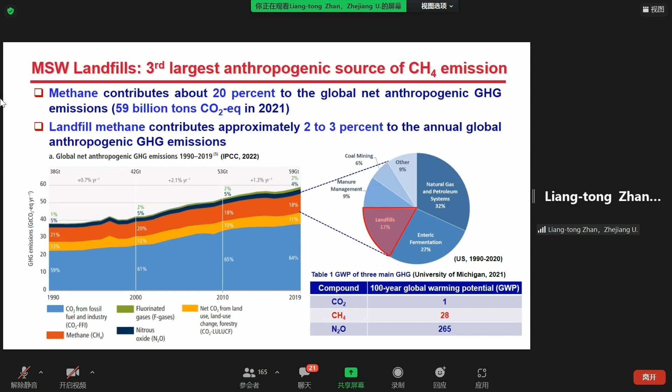How about landfill methane emission potential in mainland China? Between 1980 and 2020, 3.3 billion tons of waste was disposed of in thousands of landfills.

From 2021 to 2030, 0.85 billion tons of waste will still be landfilled at sanitary landfills. Landfill emission potential from such a huge amount of waste should be evaluated.

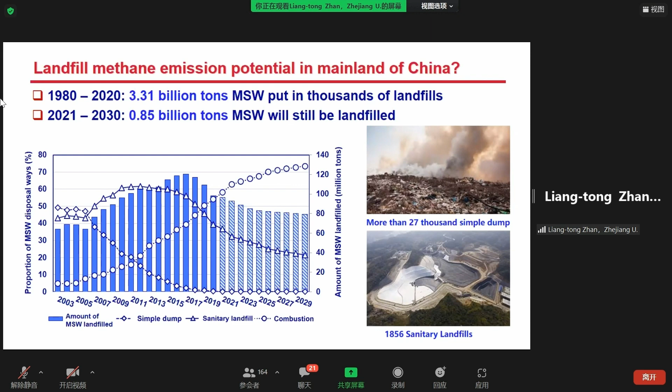There are two ways for landfill methane emission reduction. One is landfill gas collection and treatment. For example, the collected methane is used as fuel in a power generator.

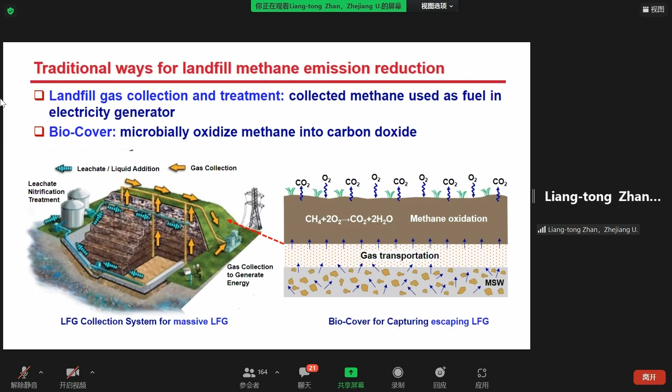Another way is to place a biocover on the landfill surface. The escaped methane will be microbially oxidized into carbon dioxide, so the global warming potential is reduced.

Landfill methane production depends on waste composition. The left figure shows the relationship between food waste content and GDP per capita for 20 countries. It can be seen that the higher the GDP per capita, the lower the food waste content.

For countries with GDP per capita less than $10,000 US, such as China, India, Brazil, food waste is the main component with a proportion of over 40%, whereas waste in developed countries such as UK, Canada, United States contains less than 40% food waste content. Here, 40% is taken as the threshold value to classify waste into HFWC waste and LFWC waste.

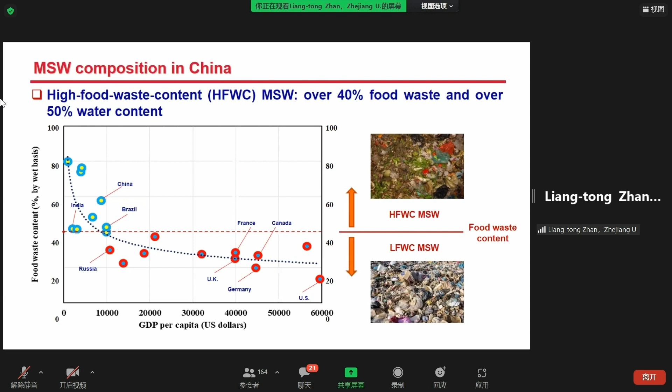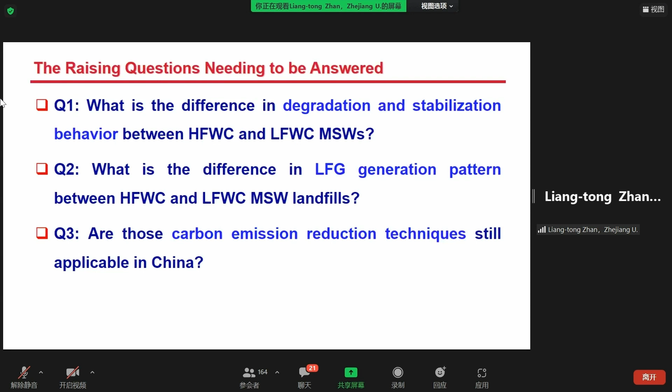With this difference in waste composition, the following questions are raised: What's the difference in degradation behavior between HFWC and LFWC? Is there any difference in landfill gas generation? Are those carbon emission reduction technologies applicable in China?

So let me talk about degradation and stabilization of HFWC waste.

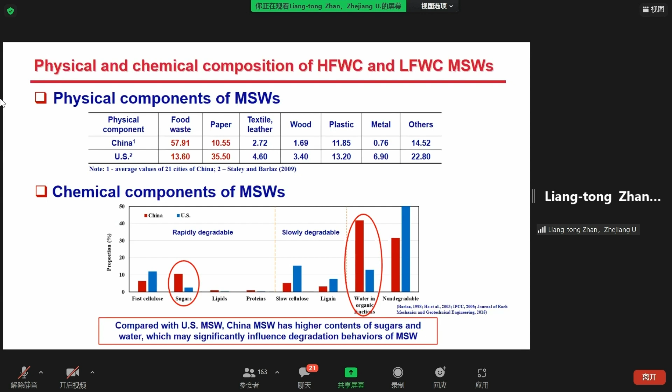This table shows the physical components of waste from China and the United States. The food waste content of Chinese waste is about 58%, whereas paper is the main component of United States waste. With respect to chemical component, Chinese waste has higher sugar and water content than U.S. waste. This difference will significantly influence degradation behavior.

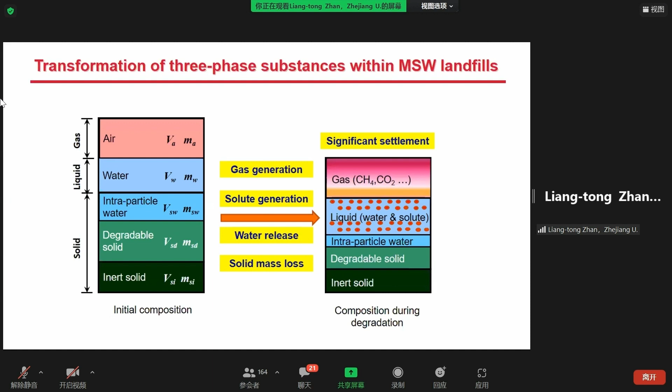The substance in the fresh waste can be divided into air, water, and solid phase. The solid phase contains intraparticle water, degradable solids, and inert solids. After landfill, waste degradation results in solid mass loss, water release, solute generation, gas generation, and also significant settlement.

A large-size bioreactor experiment was carried out to investigate the degradation behavior of HFWC waste under anaerobic conditions. This is similar to most landfills in China.

The landfill cell is 7.5 meters high and 5 meters square. 91 tons of waste was filled and compacted and covered with HDPE and geomembrane.

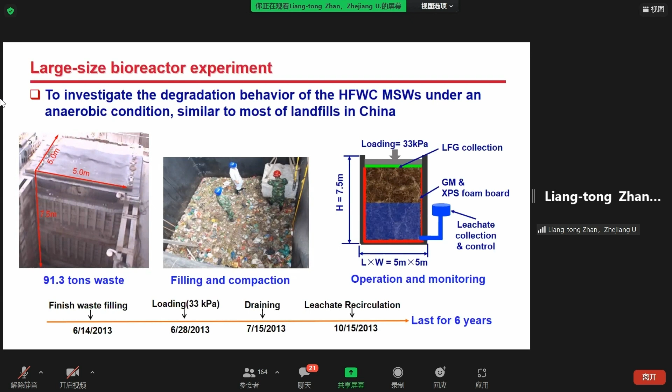The landfill cell was overlaid with loading, leachate, and gas collection systems, and so on. Comprehensive monitoring was conducted and lasted for 6 years.

This slide shows the experimental results, including leachate production, gas production, temperature change, and settlement. You can see from this figure, within 2 months, 27 tons of leachate was collected. The quantity is equal to 30% of total waste mass.

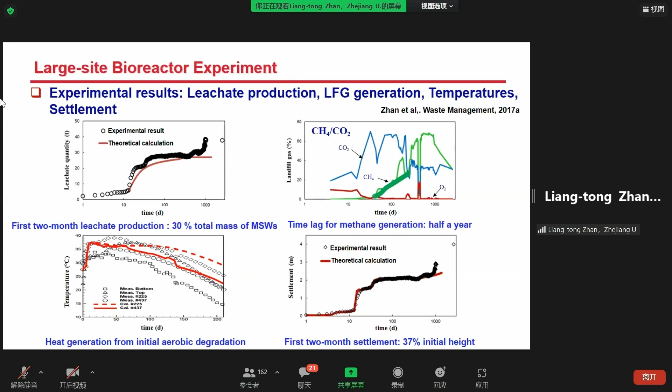After half a year, methane generation was observed. As shown in this figure, heat generation from initial aerobic degradation resulted in temperature increase. The 2-month settlement amounts to 37% of the initial height of the waste pile.

On the basis of the experimental results, a degradation-consolidation model was developed to simulate the multi-coupled process at the landfill. Governing equations involving biochemical degradation, skeleton compression, liquid flow, gas transport, and solute transport were deduced.

Numerical solution was achieved on a platform, OpenGeoSys. During the calculation, the change of constitutive relationship induced by solid mass loss is considered. The material property will be updated at each iteration step.

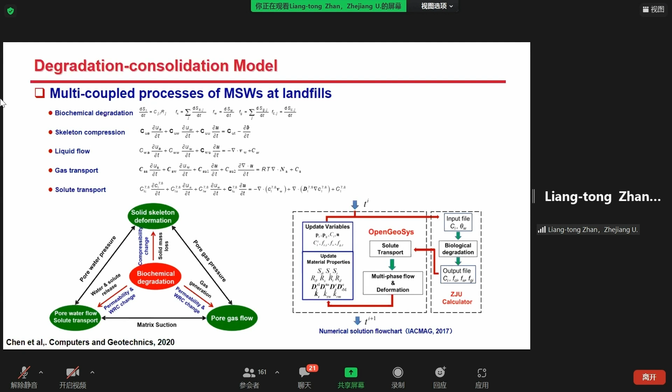The newly developed model was verified by the large-size bioreactor experiment presented before. The numerical results in terms of settlement, leachate production, VFA concentration, and gas composition basically represent the experimental results.

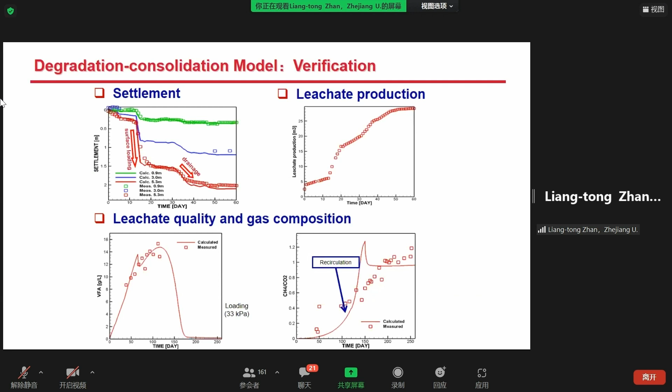The theoretical model was used to simulate the stabilization process. A one-dimension model with 10-meter height was investigated. The table shows the contents of degradable component put in the model.

It can be seen that LFWC waste has much more degradable contents than HFWC. The mass fraction of faster degradable matter in HFWC waste is significantly higher. The parameters of biochemical degradation input in the model are the same for HFWC and LFWC.

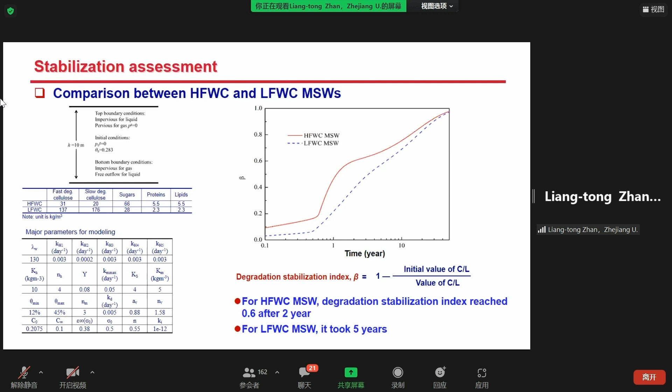We put all 4 curves together in this figure. The figure includes the measurement of beta value from waste samples taken from different landfill sites.

Based on this figure, the stabilization process of HFWC waste landfill can be divided into 3 stages: rapid degradation stage, slow degradation stage, and post-stabilization stage.

The rapid degradation stage takes 2 years, during which about 80% of intraparticle water was released, about 60% of gas generation potential released, and over 80% of compression completed.

When the beta value exceeds 0.6, the landfill enters the slow degradation stage in terms of gas generation and settlement. It generally takes about 20 years to reach the post-stabilization stage under anaerobic conditions.

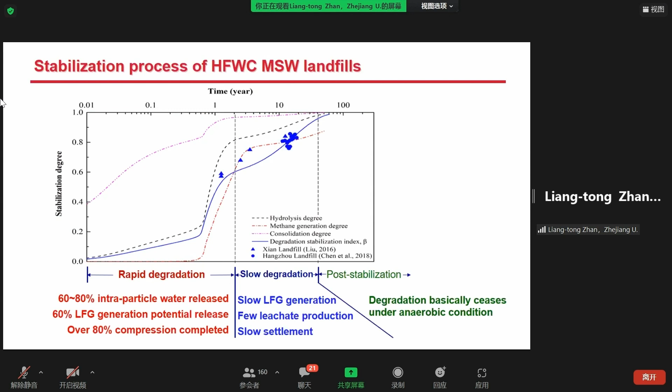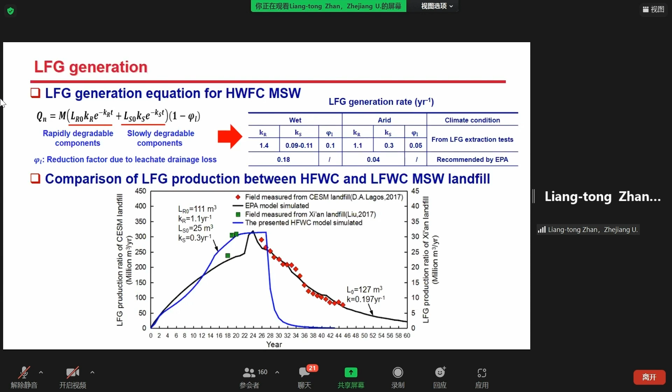With the calculated gas generation, the equivalent carbon emission potential (ECEP) for landfill waste can be evaluated by this equation. The total ECEP is equal to 1,900 kilograms per ton of waste. It is a big value, nearly twice the total mass of waste.

This is due to the very high global warming potential of methane. If the landfill is equipped with gas collection and a power generator, the ECEP will decrease as a result of methane combustion and electricity generation.

The reduced ECEP can be evaluated by the second equation. This table shows ECEP corresponding to different landfill gas collection rates. If 90% of gas is collected and recovered as energy, then the ECEP will reduce to...

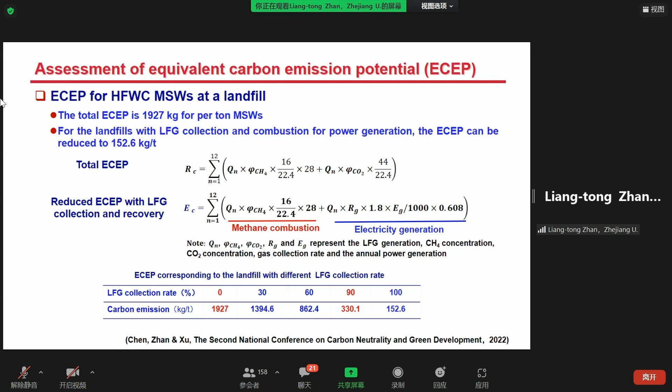330 kilograms per ton of waste, only 17% of the total potential.

The landfill methane generation between 2021 and 2030 in China can be predicted. The quantity is between 49 to 66 billion cubic meters, corresponding to 0.9 to 1.2 billion tons of carbon dioxide.

It should be noted that about 75% is from waste landfilled in the next 10 years. Only 25% is from waste landfilled over the last 40 years.

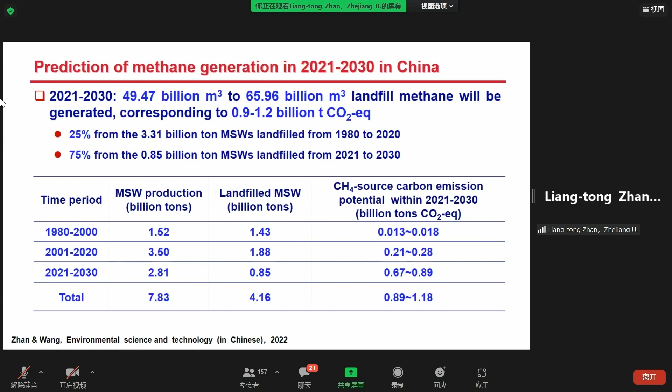Now let's talk about carbon emission reduction technology. First, based on the identification of three stabilization stages at HFWC landfill, a strategy was proposed for landfill at the rapid degradation stage.

Landfill gas collection and methane recovery should be implemented. During the slow degradation stage, it is suggested to put ecological soil cover on the large sanitary landfill.

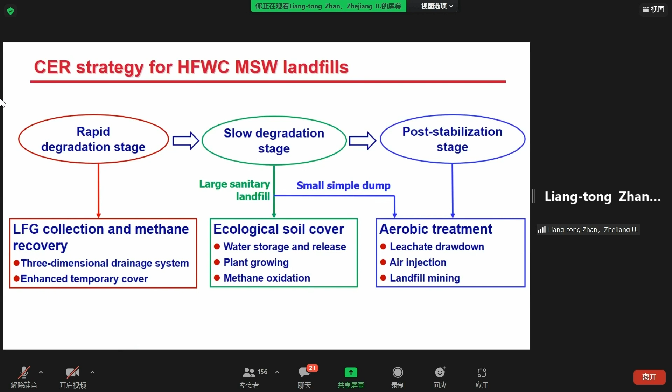Aerobic treatment is done on small, simple dumps. Landfill mining can be done at waste at the post-stabilization stage.

During the rapid degradation stage, the landfill is generally flooded with leachate. The liquid-gas interaction at the wet landfill is quite strong. Landfill gas tends to be entrapped under the leachate level.

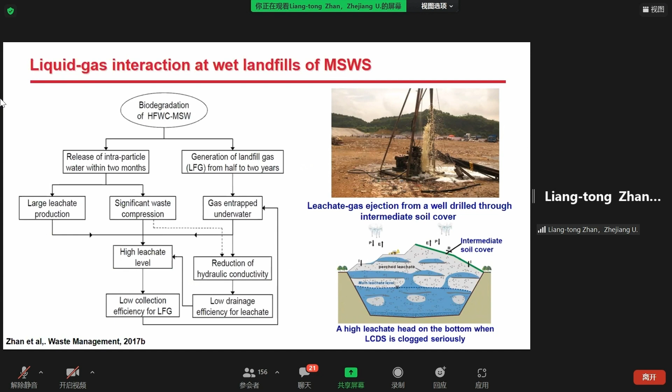Accumulation of gas pressure develops. This figure shows a mixture of leachate and gas ejecting from a well drilled through the intermediate soil cover. This figure shows field observation of high leachate mounds.

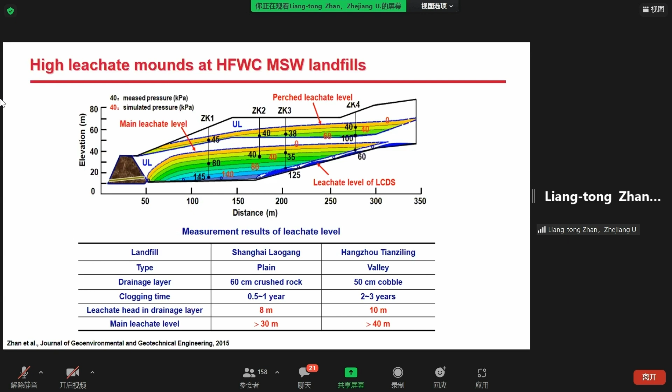In addition to high leachate production, another reason for high leachate level is the clogging of the drainage system at the bottom. The main leachate level was measured at about 30 to 40 meters at two representative landfills located in plain and valley areas. The high leachate level resulted in lower gas collection efficiency.

As shown in this figure, the green color indicates the gas collection rate at most landfills in China is less than 40%, significantly less than that in the United States and European countries. The exception is Shenzhen landfill, which will be further discussed later.

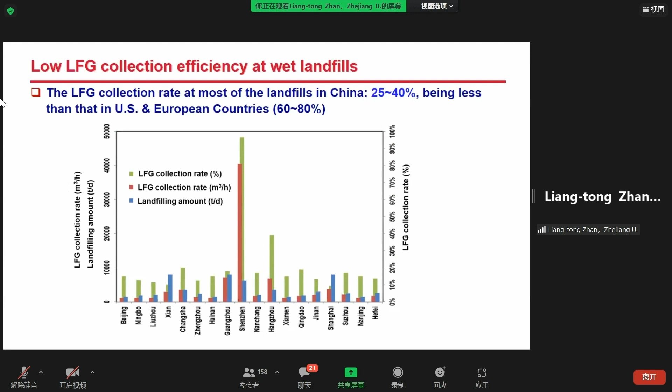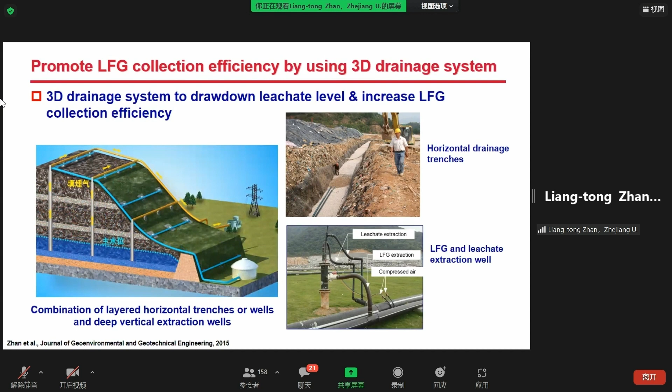In order to promote gas collection efficiency, three-dimensional drainage systems are designed to draw down leachate level. The system is made of drainage trench and deep well for leachate and gas extraction, able to separate downflow of leachate and upflow of gas properly.

In addition, an enhanced temporary cover is implemented on the landfill surface. The system is made of HDPE geomembrane underlain by gas collection pipe. 90% of sealing rate can be achieved by this enhanced cover.

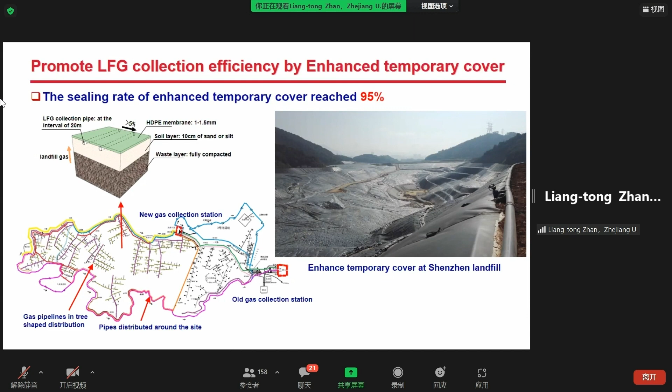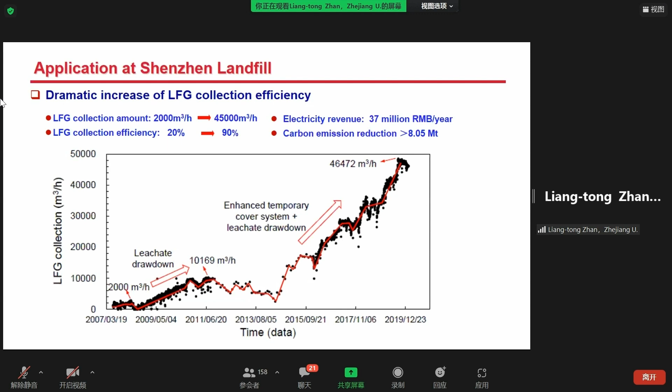Similar application at Hangzhou landfill resulted in a substantial decrease in methane concentration on the landfill surface. It means the methane emission dropped down substantially.

As mentioned previously, ecological soil cover is suggested for use on the largest sanitary landfill at a slow degradation stage. Professor Charles already presented the working principle in detail. This generally consists of 3 layers, including vegetation, fine-grained soil layer for water storage, and coarse-grained layer for capillary barrier. Another less permeable layer is only needed in humid areas.

Carbon emission can be reduced by the microbe-induced methane oxidation layer. The water storage capacity of soil cover can be increased by the capillary barrier effect. This effect at the fine and coarse-grained soil interface was reproduced by microfluidic technique in our laboratory.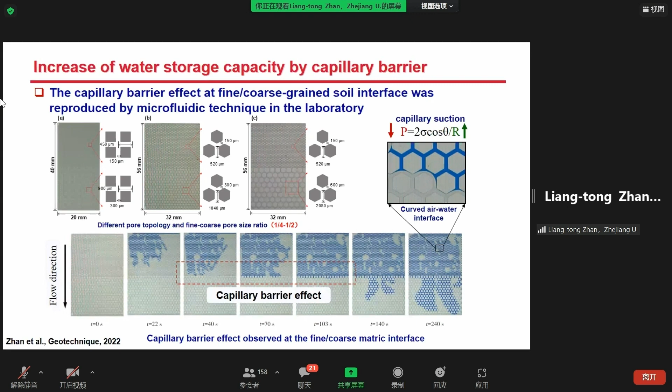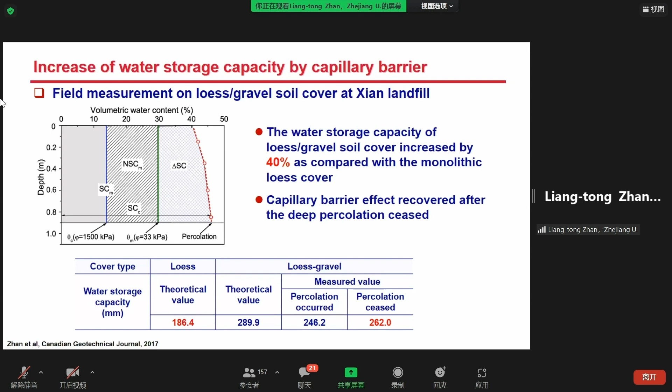This picture shows a significant time lag for the wetting front breaking through the interface. High water saturation was achieved in the fine grained layer. Field measurement at the Xian landfill demonstrated the water storage capacity of the cover increased by 40% compared with a single layer of loess cover.

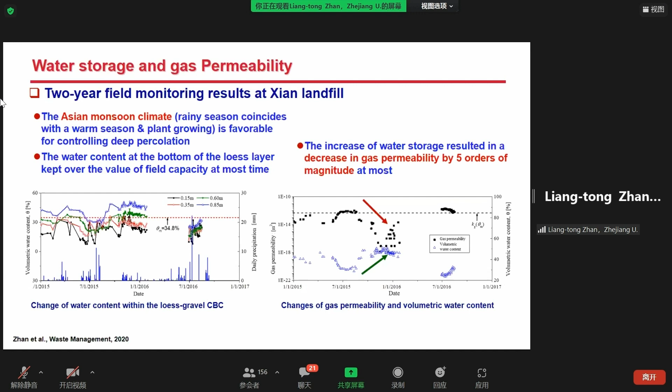The two years field monitoring showed that the Asian monsoon climate is very favorable for the performance of this cover, because rainy season coincides with warmer season and plant growing, so it can release infiltration water. The water content at the bottom of the loess layer stays over the value of field capacity most of the time. The increase of water storage resulted in a decrease in gas permeability by up to 5 orders of magnitude.

As there is much vapor and heat supply from the wet landfill, field evidence showed there are favorable effects on the performance of soil cover. For example, vapor supply does a favor to plant growing in the dry season, and heat supply does a favor to the microbial induced methane oxidation in winter.

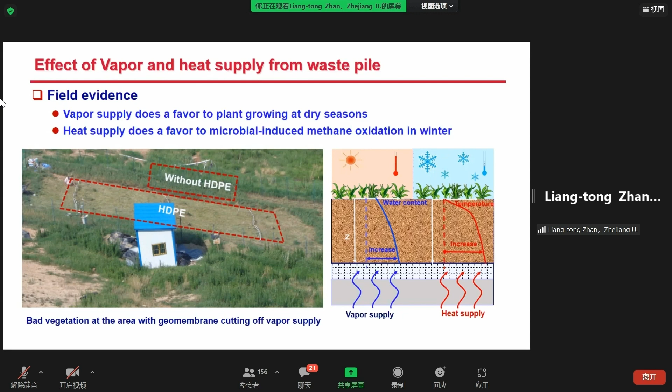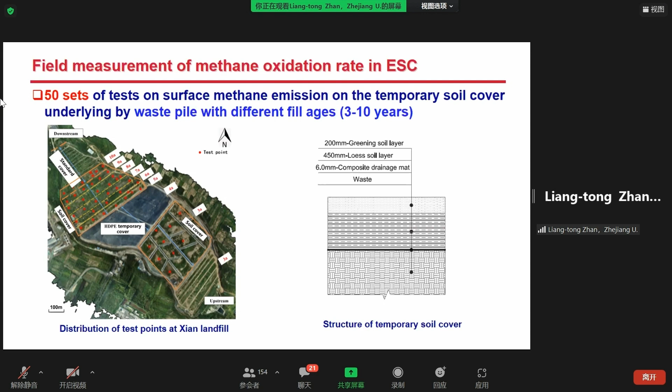A 50-set test was performed to measure surface methane emission on the temporary soil cover at the Xian landfill. As shown in this picture, the landfill is 2,000 meters long from upstream to downstream. 50 sets of points were distributed on the waste pile with different fill ages, ranging from 3 to 10 years. The figure shows the structure of the temporary soil cover.

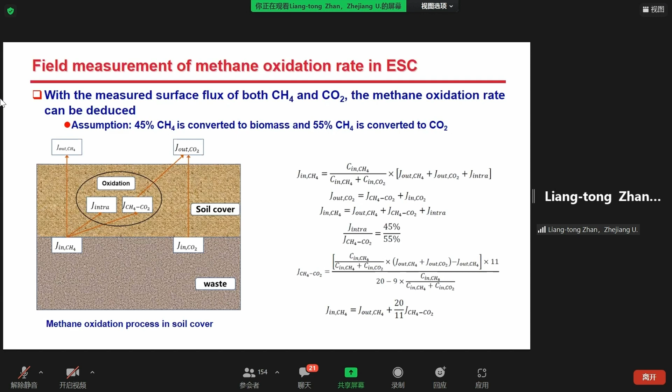With the measured surface flux of both methane and carbon dioxide, the methane oxidation rate can be deduced. Literature review is assumed in the oxidation process: 45% of methane is converted to biomass, and 55% of methane is converted to carbon dioxide. Then the flux of methane at the bottom of the cover can be determined, and the oxidation rate can be calculated.

The left figure shows the surface flux of methane measured at 50 test points. The methane emission at 80% of test points is less than the limit required by Australia. The figure shows the fraction of methane oxidation occurred in soil cover; the fraction is over 90%, meaning 90% of methane is transferred into carbon dioxide.

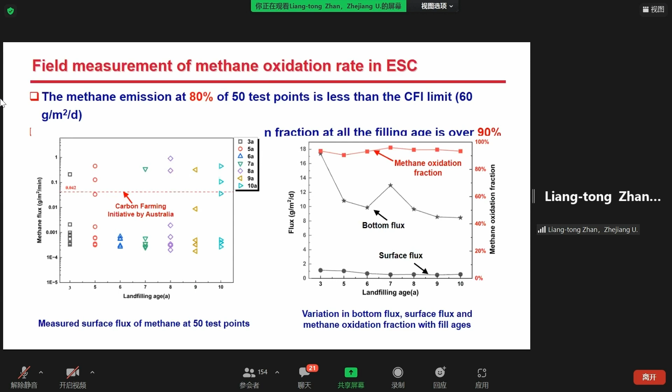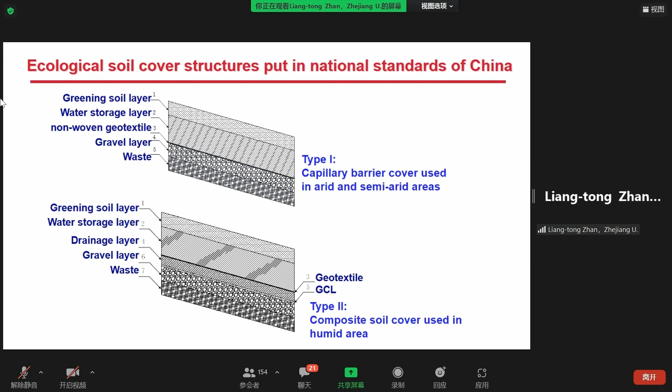Two types of ecological soil cover strategy have been put into the national standard of China. One is capillary barrier cover used in arid and semi-arid areas. The other is composite soil cover used in humid areas.

For the last part, this involves aerobic treatment and landfill mining. Aerobic treatment at wet landfill involves 2 procedures: one is dropping down the leachate level, the other is air injection.

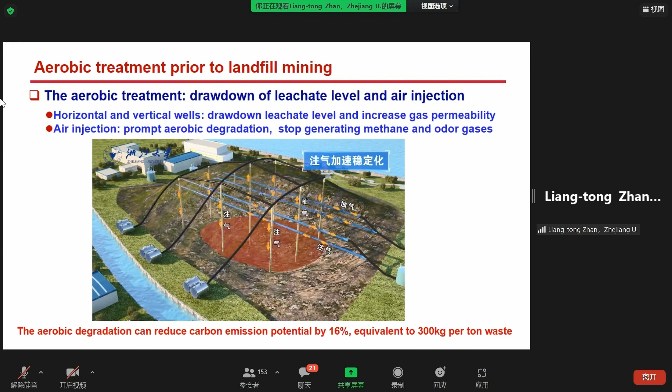After leachate drawdown, the gas permeability increases, so air can be injected into the landfill to create an aerobic environment, so the methane generation stops. It's estimated aerobic degradation can reduce carbon emission potential by 16%.

After aerobic treatment, the waste pile can be excavated, screened and reused. The waste is split into three parts. Lighter material such as plastic or textile can be used for power generation. The second, coarse aggregate, can be used as embankment fill material. The last, fine fraction, is rich in humus, but the content of heavy metal exceeds limits, so it should be treated and used for garden and forest.

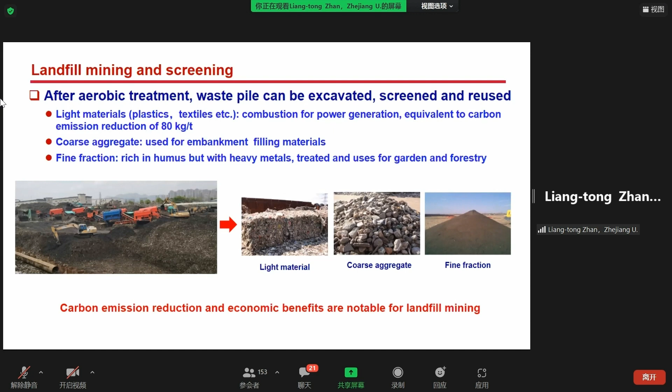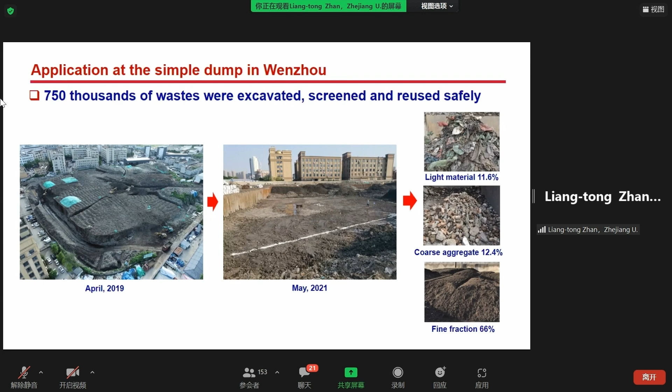Carbon emission reduction and economic benefit are notable for landfill mining. The technique is implemented at a simple dump in Wenzhou City, where 750,000 tons of waste was excavated, screened, and reused safely.